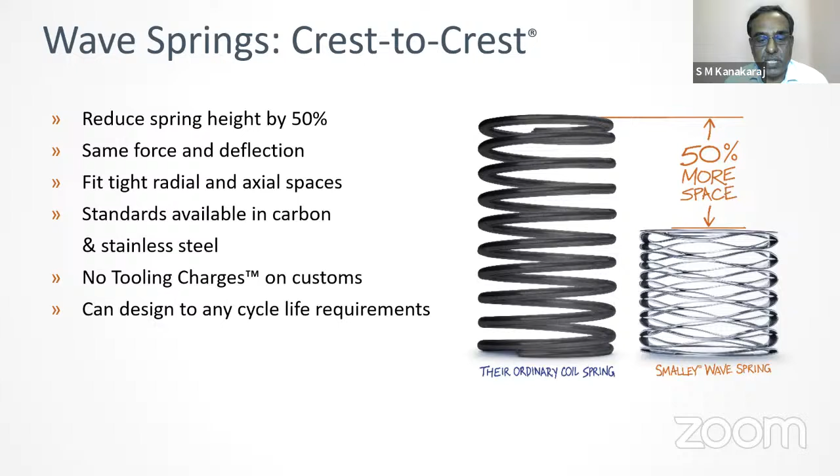Smalley is the global leader and inventor of wave spring technology. The concept of wave spring is wherever you are using a coil spring, the same spring force deflection can be achieved with 50% height. So the entire size, weight, and raw material cost can be brought down. That is the main advantage of the wave springs. Because of its crest-to-crest design, this will provide the same force and deflection which a coil spring can provide.

Approximately, it can reduce up to 50% of the height. Because you need certain force and deflection, you are building using a coil spring. In order to accommodate that height, you have to build very bigger assemblies, like in a valve or a pump or a mechanical seal or an actuator. With this crest-to-crest wave spring, you can build compact, lightweight assemblies. This enhances designing compact and smaller component assemblies. Also the usage of raw material is reduced.

These wave springs can fit in any radial and axial spaces, very shorter cavities it can fit. We can offer standard parts. We have about 11,000 standard parts, available in 60 plus different materials, starting from carbon steel, also Inconel, titanium, tantalum, and stainless steels. All the products don't require any tooling charge because it requires only special purpose machines wherein we take a wire, flatten it in stages, and then wind it. So there is no tooling required, no tooling charge or tooling development period or tooling cost.

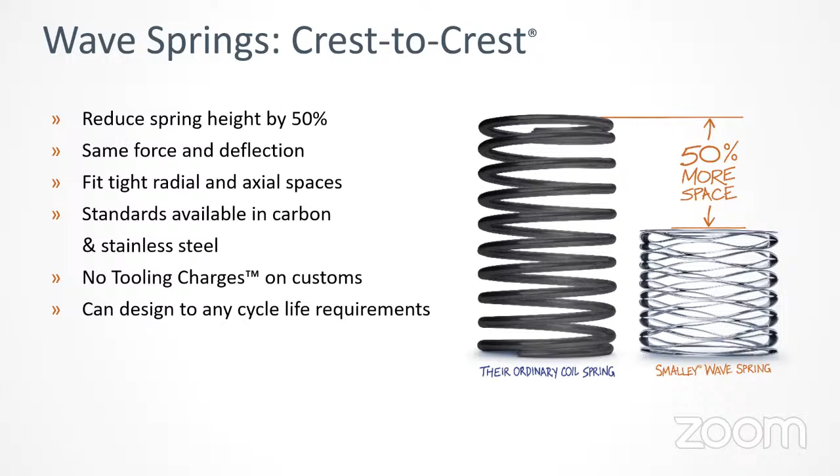Wave springs are also available in a single turn, called overlap type and gap type. This is mainly used in bearing preloading and tolerance take-up applications.

For example, in automotive engines, gearboxes, or differential systems, shims are used during assembly to take care of gaps. That can be replaced with a wave spring so it provides a cushioning effect and better performance and longer life for the parts. It's mainly used in bearings for preloading to ensure smooth running of the bearing and enhances the lifetime and performance of the bearing and the overall assembly where it is fitted.

There are two methods to manufacture a single turn wave spring. Either you take a sheet, stamp it, and then form the waves. We don't do the stamped wave washer because in that process, the grain structure, which moves in one direction in the sheet, gets damaged when you stamp it. That reduces the lifetime, and the component made out of the stamped process will reach fatigue very easily, and will not provide the spring force until the life cycle of the assembly.

Whereas here, we take a wire, flatten it, and then wind it, so the circular grain structure is not damaged. This possesses superior strength and stability and offers the spring force until the life cycle of the assembly.

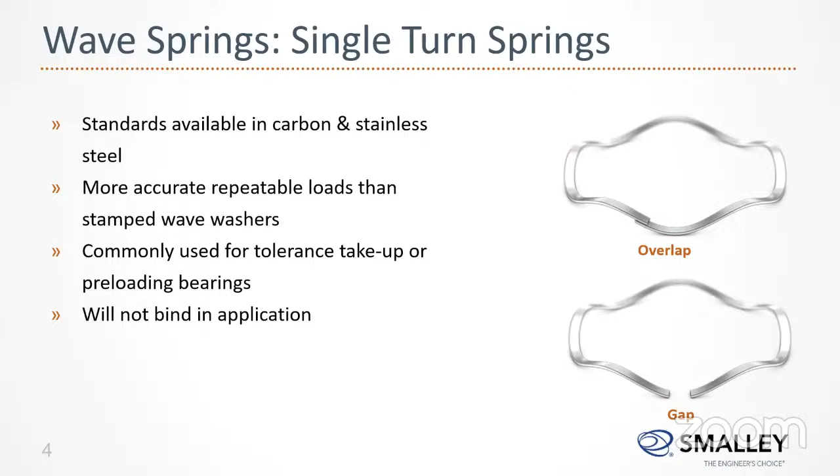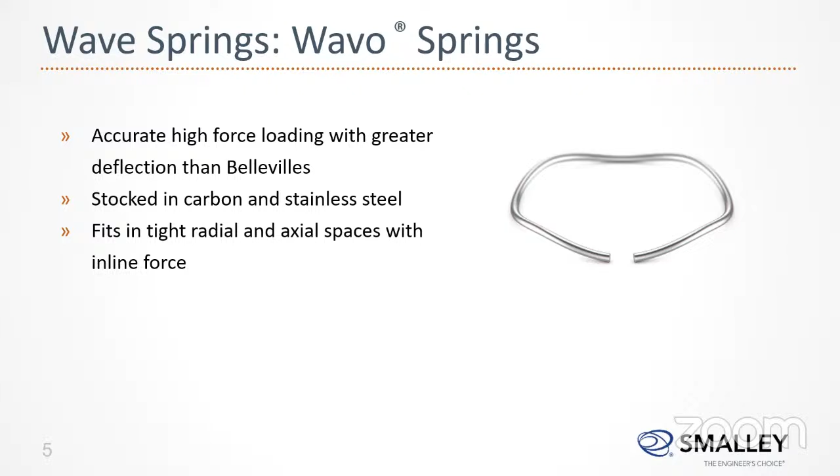The Wavo spring is a patented product and a better replacement for the Belleville washer. The Belleville is like a flat conical washer, mainly used for spring purposes. Here we offer a wave spring with a circular cross section, which takes much less space compared to the Belleville washer. All these products are available in 60 plus different materials and can fit into any tight radial cavities.

In some applications like valves, they used to stack multiple Belleville washers. That can be eliminated by using a nested spring, which provides 2 to 3 times more load compared to a crest-to-crest wave spring. This also reduces the entire size, weight, and cost, and can be operated in very compact cavities. It eliminates individual stacks and provides highly accurate and repeatable loads—it's a Belleville stack alternative. It's mainly used in gate valves, globe valves, and all industrial valves for live loading applications.

Another technique to achieve higher loads is by interlaced springs. Normally crest-to-crest springs are manufactured with a single wire, but here you can see there are 2 wires—we can even manufacture with 3 wire and 4 wire. So without increasing the height, we can increase the load 2, 3, or 4 times more, providing increased loading and greater fatigue resistance.

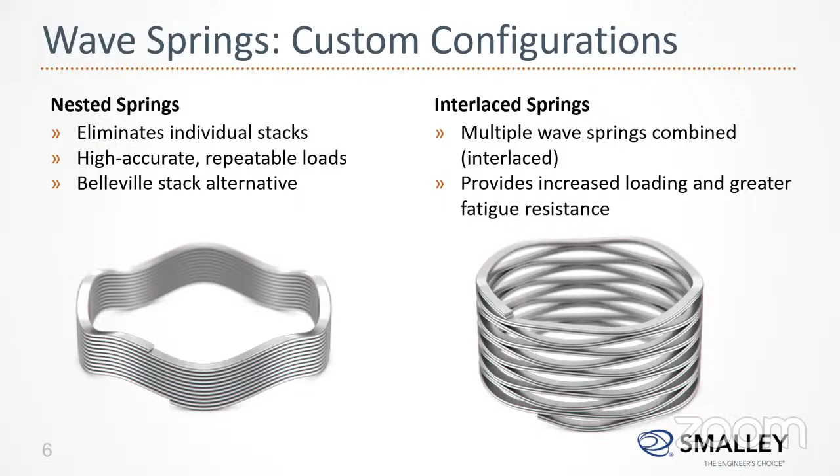Some applications of wave springs for bearing preload can be used in industrial and automotive clutches. They're also used in all types of valves—industrial valves, connectors—which are one of the major applications, as well as vibration isolators and water valves.

May I know what kind of background the participants are from, so that I can share more application details? They are from a higher education background.

Mr. Radhakrishnan Subramanian, can you introduce yourself? Good afternoon, am I audible? Yes, very much audible. I'm basically from the financial services industry.

This has been a learning experience listening here because I'm able to understand what you're trying to say. Understood. But maybe what I can do is...

In FICCI, where I'm a panelist in the technology panel, I can talk to the convener in the concerned manufacturing vertical and give you a reference there so they can make use of your knowledge and wisdom in sharing—that much I can do.

My role is mainly to work with the design engineering R&D team, where new product development happens. It takes 2 to 3 years, but we have to work closely with the design engineers, R&D and engineering team, get it implemented, do the testing, validate it, and once production starts it happens anywhere in the world. I closely work with the design R&D team in industries like aerospace, space, defense, automotive, oil and gas, and semiconductor.

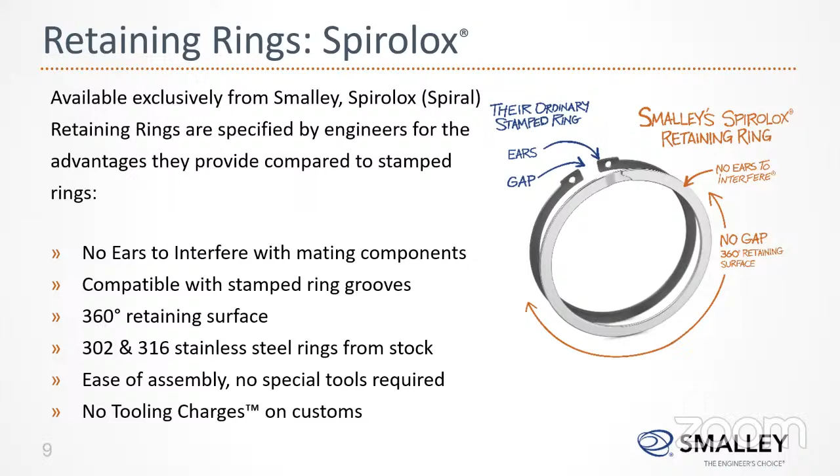So this is how it is assembled. We take a layer, just insert it to the groove, and then push the remaining part of the retaining ring into the groove, whether it is a housing groove, internal, or shaft groove.

If volume is high, it has to be automated. So we can offer plug and plunger arrangement so that it can be assembled in automated production lines, mainly in the automotive and connector industries.

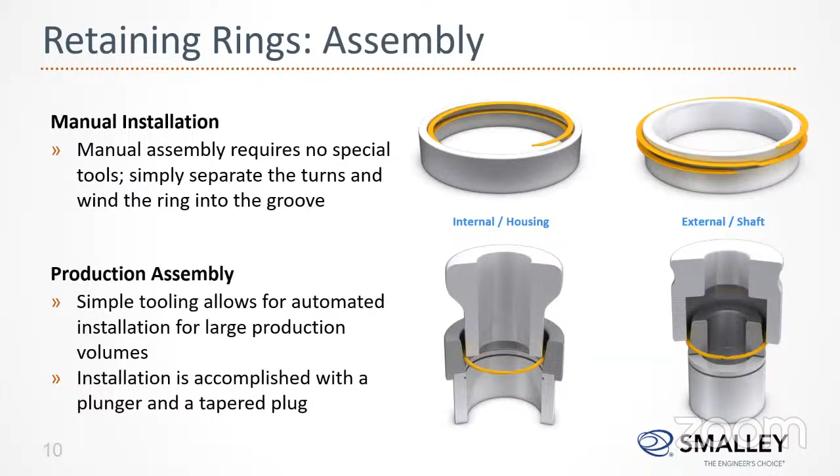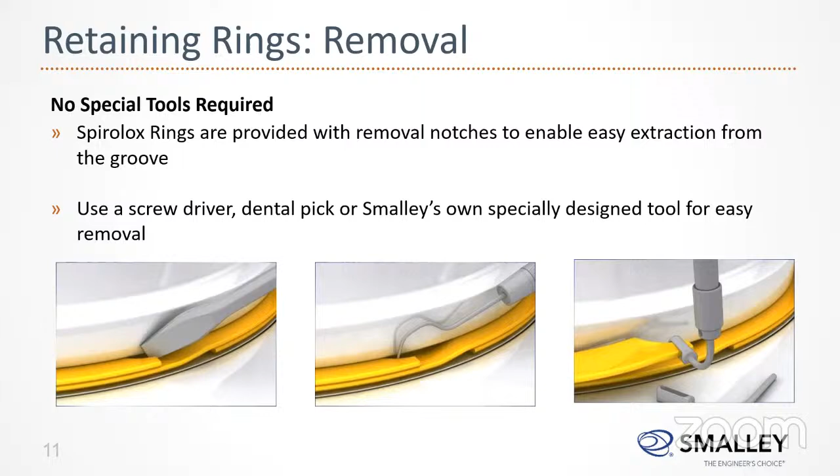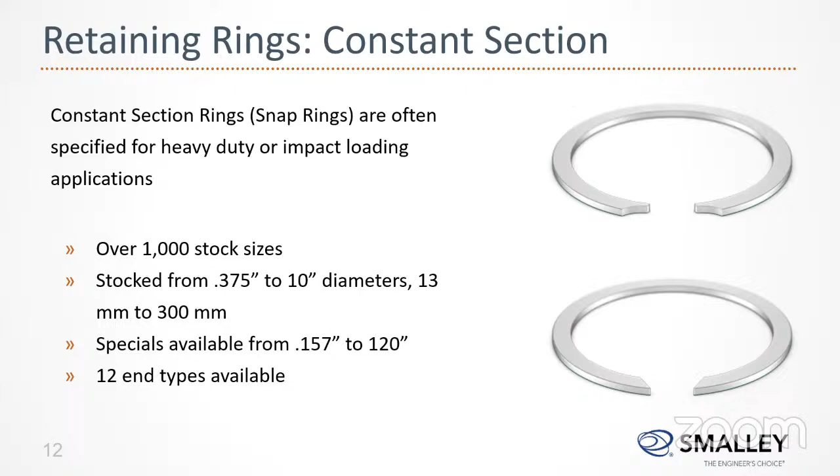We also offer hoopster rings, with a thin wall, wherever you have a limited groove depth, either to hold a gear or a bearing in an assembly, gearbox, differential, engine, or valve. We can use this hoopster ring.

And the wave ring is a combination of both spring and retainer ring. It does a dual purpose: it provides a retaining force and also provides spring force. Certain applications demand that, so we offer wave rings, which are a combination of wave spring and retainer ring.

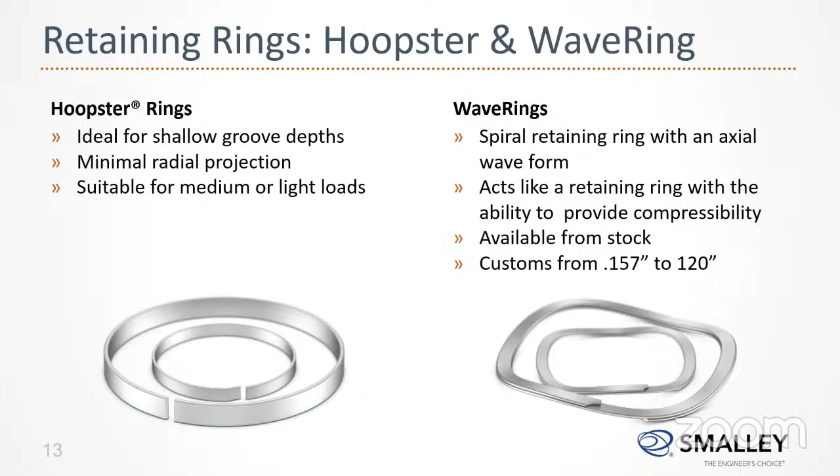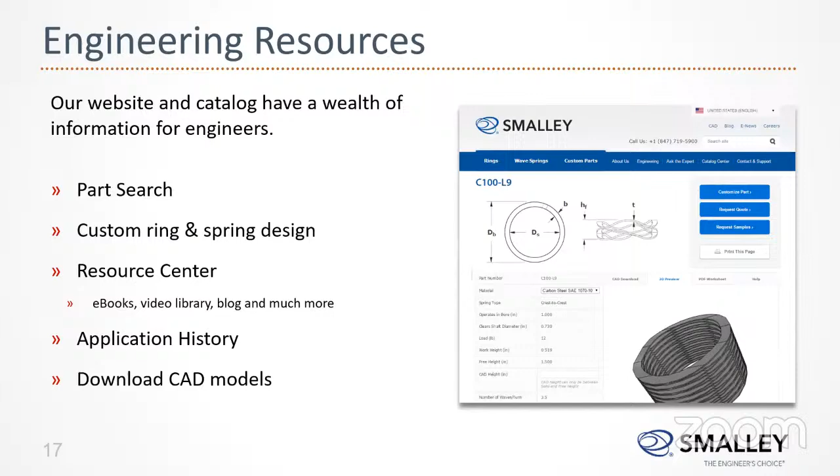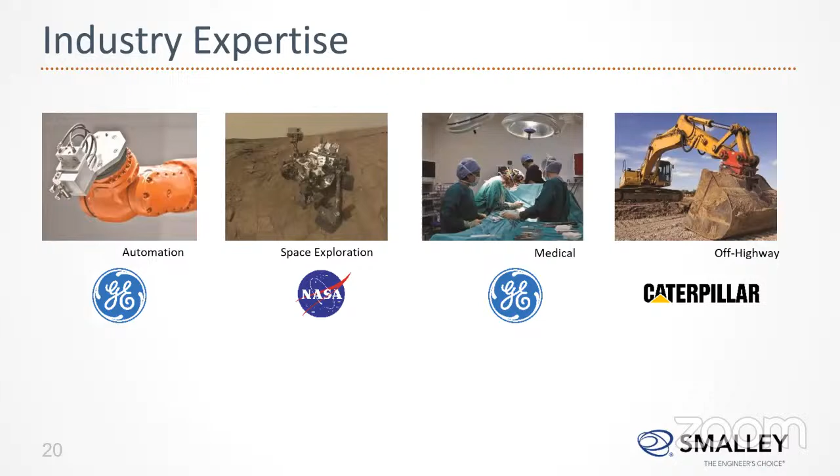Some of the industries which use wave springs and retainer rings more commonly are automation, mainly used in robotics; space exploration, where we supply to NASA, and in India we supply to ISRO in many projects, and also to DRDO, Defense Research and Development Organization. We are engaged with a lot of defense programs. Also medical, off-highway like Caterpillar, consumer products, energy, oil and gas, power, aerospace, and automotive.

The main advantage of Smalley is the manufacturing process they developed, the edge winding process. On the right, you can see the stamped process, wherein when you stamp the part, you damage the grain structure because the grain structure moves in one direction in the sheet. Once it's stamped and formed into waves, over a period of time, if you put it in a motor or pump, it loses its spring force and will not provide the necessary force for bearing preloading.

Whereas in the coiled process, on the left-hand side, we do the coil process, or edge winding process. We take a wire, flatten it, and wind it. During winding, we form the waves - that's how the wave spring is formed. Here, the circular grain structure is not damaged, so this possesses superior strength and stability and offers lifetime and performance.

We can even make simple design changes during manufacturing and new product development without any additional tool or time. And it is faster and more economical because there is no scrap, as you can see.

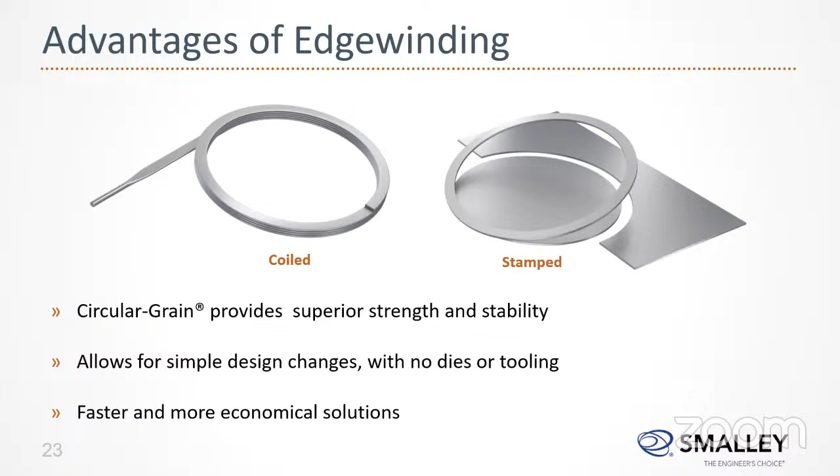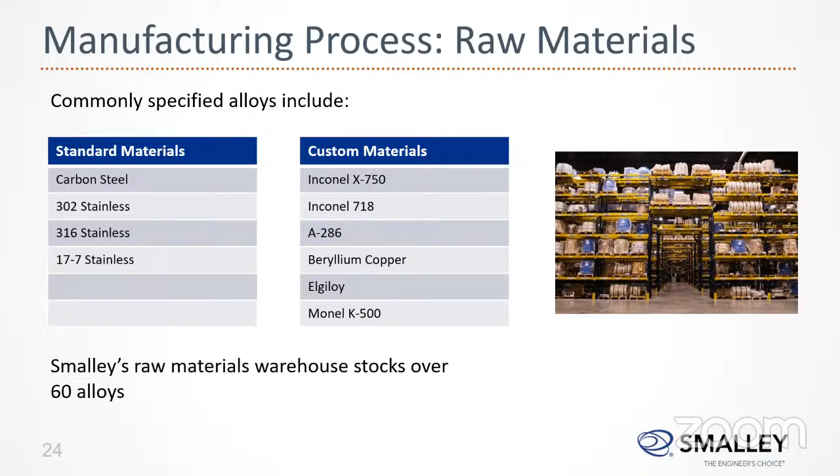Standard materials we offer include carbon steel, SS302-316-17-7, and custom materials like Inconel, Monel, titanium, tantalum, A286 special aerospace grade steel, Elgiloy, Monel, and 60 plus different alloys. Smalley possesses all certificates - ISO, IATF for automotive, AS9100 for aerospace, and all our products are RoHS, REACH, and DFARS compliant.

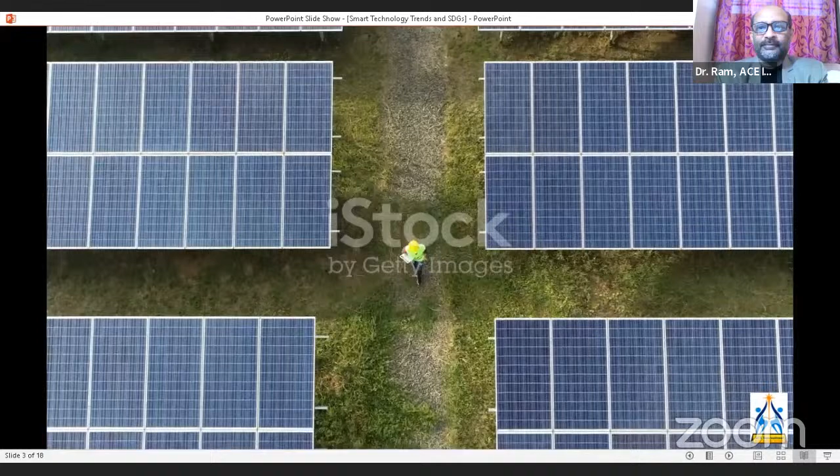Hey, tech enthusiasts. Today, I'm diving into how global tech is saving our planet. Ready to get inspired? First up, let's talk about renewable energy. Solar panels and wind turbines are now more efficient than ever, thanks to advancements in technology. These innovations are reducing our reliance on fossil fuels and cutting down greenhouse gas emissions. Imagine a world powered by clean energy. It's not just a dream anymore, it's happening right now.

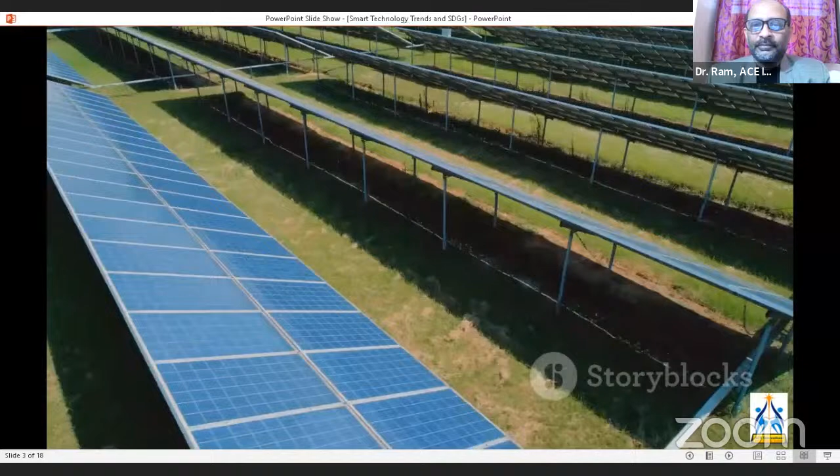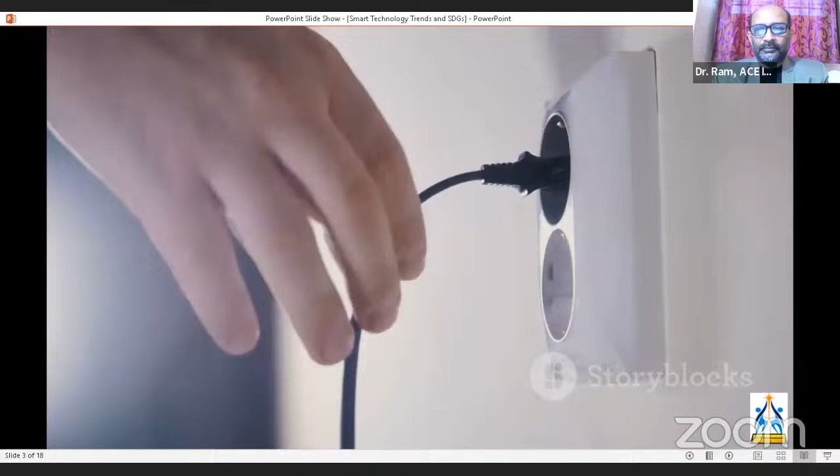Next, there's the incredible impact of smart grids. These systems use AI and machine learning to balance energy supply and demand in real time. By optimizing energy use, smart grids minimize waste and reduce costs. It's like giving our energy infrastructure a brain upgrade.

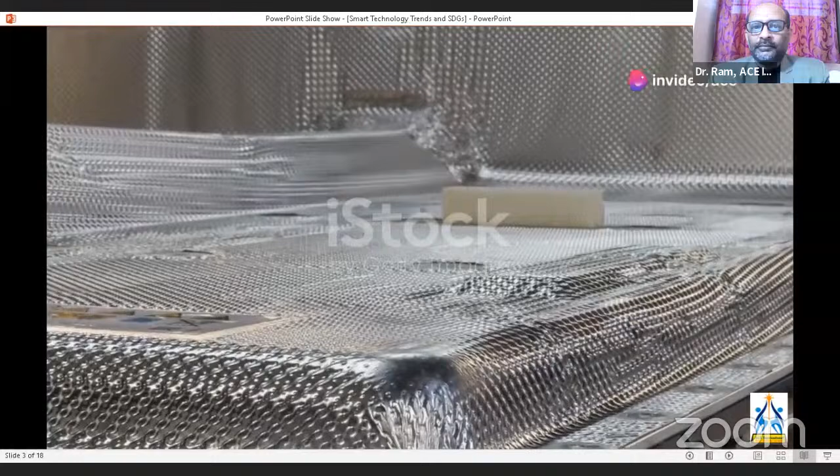And let's not forget electric vehicles. Companies like Tesla and Rivian are leading the charge with their groundbreaking EVs. These cars produce zero emissions and are becoming more affordable and accessible. Plus, with advancements in battery technology, the range anxiety is fading away. Imagine driving without guilt, knowing that you're contributing to a cleaner future.

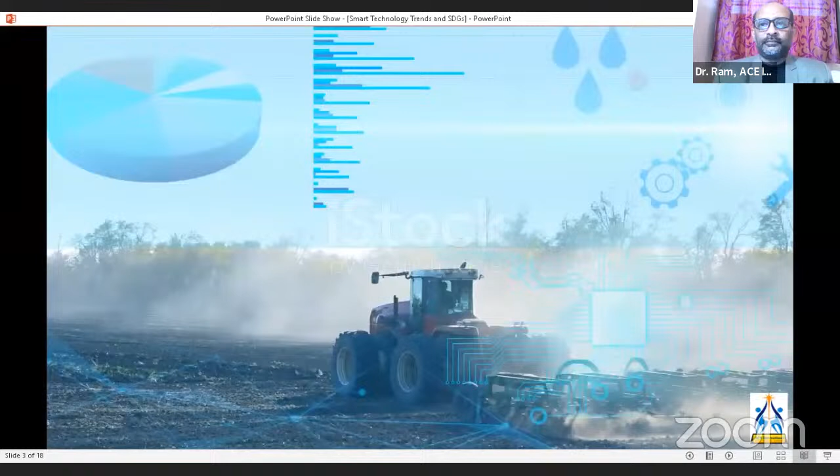But it's not just about energy and transportation. Smart agriculture is another game changer. Using IoT sensors and drones, farmers can monitor their crops with precision. They can optimize water usage, reduce pesticides, and increase yields. This means more food with less environmental impact. Sustainable farming is feeding the world while protecting our planet.

Then there's the rise of green buildings. Innovative materials and designs are making our homes and offices more energy efficient. Smart thermostats, LED lighting, and green roofs are just a few examples. These technologies reduce energy consumption and create healthier living spaces. Imagine your home being as eco-friendly as it is comfortable.

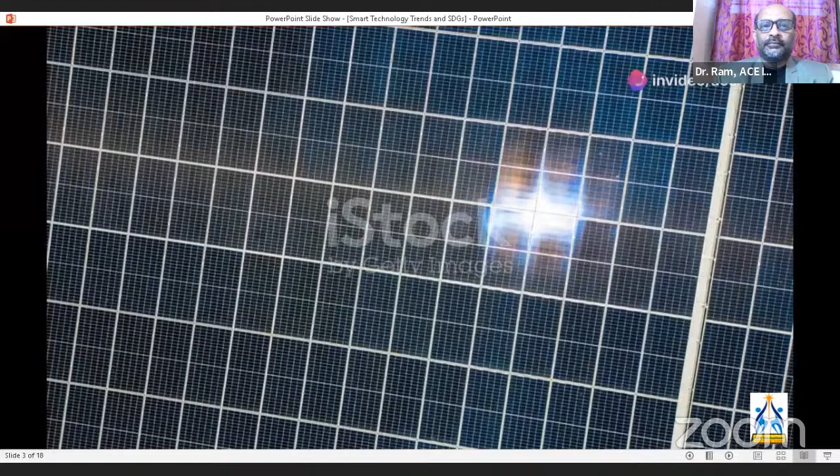Lastly, let's talk about waste management. Tech is turning trash into treasure. Advanced recycling technologies are transforming waste into new materials, and with AI, we're improving waste sorting and reducing contamination. The goal, a circular economy where nothing goes to waste.

So there you have it. Global tech is paving the way for a sustainable future. From renewable energy to smart agriculture, the possibilities are endless. Let's embrace these innovations and work together to save our planet. After all, we've only got one Earth. Thanks for watching. Stay tuned for more tech insights.

Thank you for listening to these small clips I created through AI, artificial intelligence tools available on the internet. We just have to provide the content and it will generate the video clips for us. This makes it very easy for my performance and delivery, very comfortable to teach and engage you to listen to the video and understand how it would be adaptable for different environments and conditions.

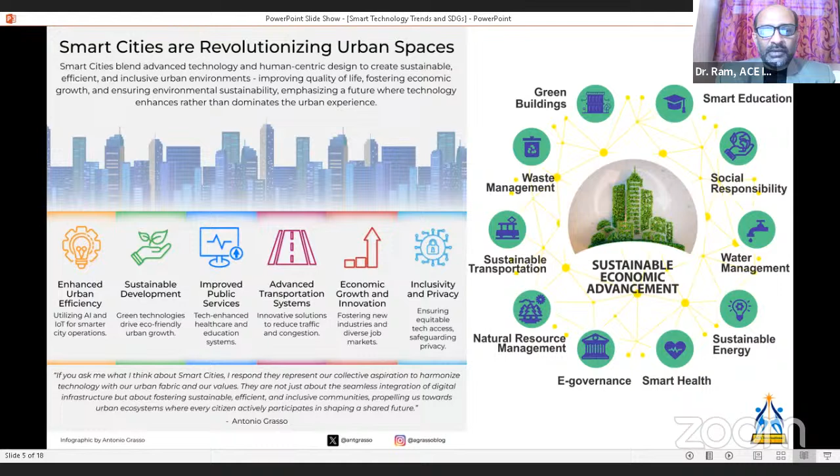Economic growth and innovation involve many developments around components like green buildings, social responsibility, water management, sustainable energy sources, natural resource management, sustainable transportation, e-governance, and effective waste management. Inclusivity and privacy require focus on ensuring equitable tech access for everybody, including in smart city traffic management, education, and reducing pollution in air, land, and water.

In many ways, shopping malls offer intelligent shopping experiences. Health systems must be very smart, with automation supporting street lights turning on and off at night, and electric vehicle charging stations, which are in high demand. In innumerable ways, electric charging stations are going to emerge in the near future.

Smart energy systems, like Singapore's approach to effective energy production management, are very environment safe and environment friendly.

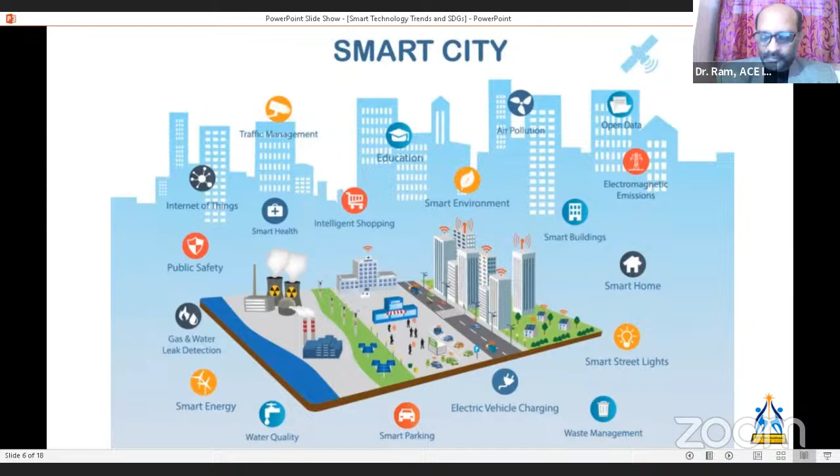This covers the smart city concept and the advantages of developing or deploying technology into society. There are many advantages when deploying this technology. In the government sector, policies must be raised and legal implications or guidelines implemented, which are very useful for us to adapt to modern trends.

Smart healthcare systems and smart citizens have their data sources aligned with government activities, enabling them to go online for any application, registration, or resource they want to procure from the government side.

Private sectors and business organizations, like chambers, charity organizations, NGOs, or big institutions and industries, are willing to use innovative business products and services, making them more suitable for revenue creation and management. There are many partnering opportunities with government by private sectors, like our Aadhaar card, a supporting device, or online applications for passports, or starting any business through online registration.

Urban residents, due to transformation from village to urban areas, many places need to find a smart way to accommodate a large crowd in a small space. Singapore is an ideally crowded place due to space constraints, but they are managing this in a more effective and efficient way.